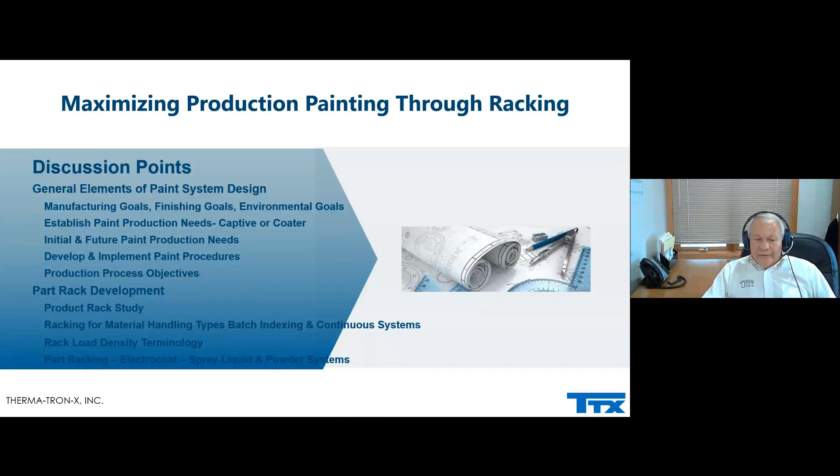We're also going to talk, obviously, about part rack development, how we should look at doing product rack studies, racking for material handling types, whether it's a batch type indexing operation or a continuous. Discussion about rack loading terminology, density, and part racking for E-coat, spray liquid, and powder systems. We're also going to be discussing 2-coat system rack considerations, whether it be separate 2-coat paint line systems, integrated 2-coat paint systems, types of conveyor rack loading and unloading considerations.

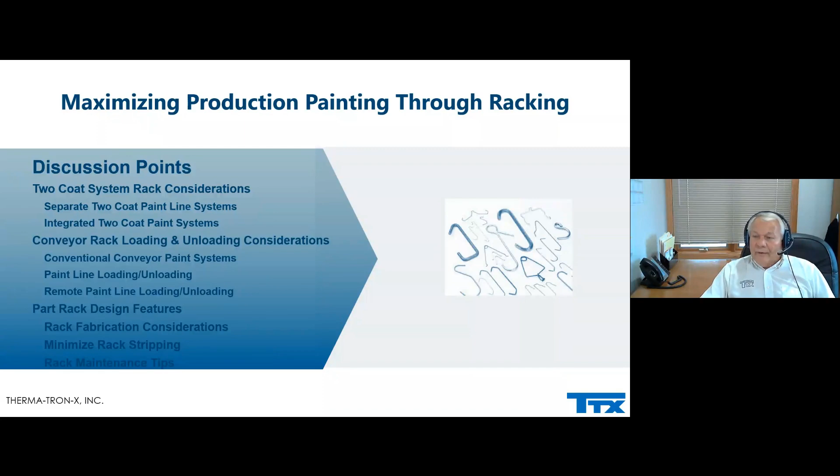Conventional conveyor paint systems with typical types of material handling, paint line loading and unloading characteristics, and remote paint line loading and unloading. Some of the savings can be seen with minimizing double handling. And then part rack design features, rack fabrication considerations, minimizing rack stripping, and rack maintenance tips.

Elements of the paint finishing design are manufacturing goals. You first have to establish your manufacturing goals as to what products you're going to be manufacturing or coating, finishing goals, you have to establish those, and environmental goals. It all is related throughout the whole entire plant. When you plan on a paint finishing operation, these are probably elements that some of you already know. However, I'm going to repeat those because it's vital to understanding the impact once you establish a paint line or a procedure for manufacturing, finishing, or environmental. Your impact is going to last for years.

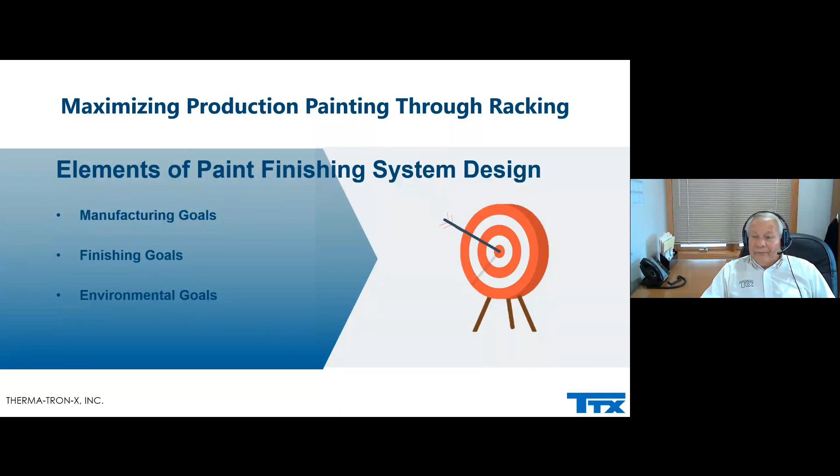In manufacturing goals, you have to look at it from the standpoint of establishing repeatable fabricating techniques. For those who manufacture, look at the techniques that you're using so that they can be repeated and keep the surface impediments down, minimizing them so that the finishing operation can be established and you can keep the rejection rates down. Integrate the manufacturing process through the plant and minimize double handling. It's vital from a cost standpoint. Handle it once, and handle it the second time through unloading or assembly.

Reduce or eliminate unfinished and finished part storage. Many times I see a lot of these companies now, a lot of the plants that I go into still have areas where they store parts for painting, staging areas for assembly. Most of the new products, paint plant manufacturing facilities today are going more flow through and just in time. But with the onslaught of, especially today with the logistics, many are starting to do the same techniques they did back in the 60s, where they would store and queue parts for painting as well as storage for assembly.

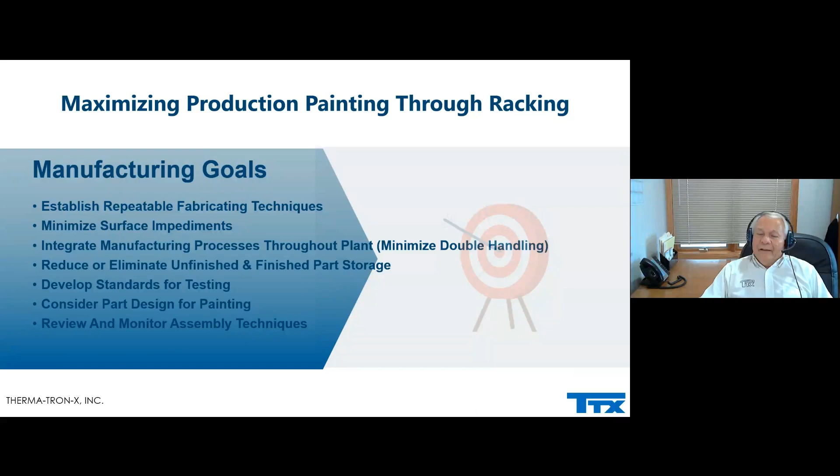Consider part design for painting. Those are aspects that I'm going to get into here, and review and monitor the assembly techniques that you're doing so that you're not damaging product. Make it relatively easy to assemble or package, and therefore be able to minimize any defects or rejects during the handling process.

The finishing goals. One of the things that we have to look at, and everybody should know this, but some people may be new or not familiar with the requirements: identify the technologies that you need for your material substrates, whether it's steel, aluminum, copper or whatever it may be. The process for pretreatment and surface treatment prior to painting is of vital importance for paint performance. It's the bonding agents that help facilitate the paint adhesion, paint performance, durability, etc.

You might consider iron phosphate, zinc, zirconium, zinc phosphate. A lot of new ones that are out there are neutral pickling to etch weld areas, etc. In aluminum alloys, it could be all kinds: zirconium, clean only, Alodine conversion coating, or non-chromate.

And the types of paint finishes that you want to consider are prime coats, whether it's a single prime coat or a single finish top coat for general industrial interior use or exterior use, like the outdoor garden market. There's a lot of people looking at a single coat finish. Two coat finishes like prime and top coat, and tri-coat finishes, a three coat process, are used for long-term durability, such as the painted transformers out in the field for electric power. That's a big thing right now because a coating lasting 20 years has to meet a lot of criteria and a lot of environmental issues.

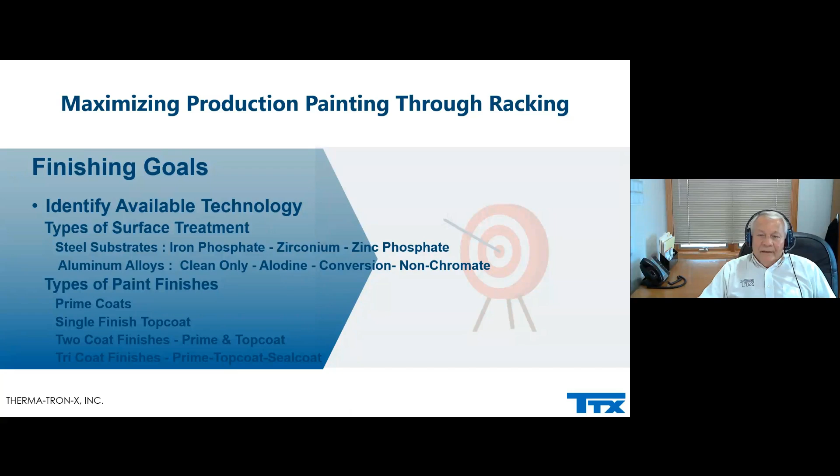Environmental aspects. When we look at a paint finishing system, we look at three different categories: manufacturing, finishing, and environmental effects. The choice of the type of paint or surface treatment, those are the key elements of integrating a successful paint finishing operation. Choosing HAPS-free and low VOC materials for paint is of the utmost importance. 20 years ago, it wasn't a major factor. It became that way now, and everybody has to look at it. There are some applications where you're not able to because of the finish type requirements.

A lot of water-based materials are being used today for the automotive market. There's still a lot of progress to be made in that area because of performance requirements. Consider alternative processes to reduce the environmental effects on air and water, like water-based and powder coating. When you try to consider powder coating a car body, which has been done, there's a lot of issues and a lot of cost involved. We're not there yet, but they're going. That's why a lot of the OEMs are going to water-based finishes.

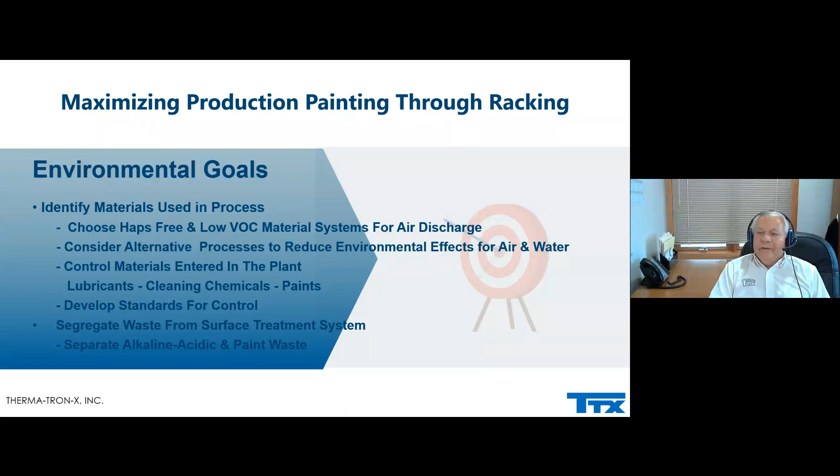Typically, paint waste. In the case of electrocoating, you might have paint solids, BODs, which is biological oxygen demand, some solvents and chemical oxygen demand requirements, and paint solids. But typically, that particular type of painting is very environmentally friendly. Same thing with powder. So recycle that powder. There's plenty of people out there that'll take the powder that is not used with the powder fines, liquids, the stripping aspects of liquids, and even powder. Those are all aspects of what we have to control.

One of the key elements of racking and material handling through a whole plant is establishing the production needs and identifying the production targets that you have. If you're going to be a captive shop, you identify what you are in terms of what the products are going to be, what you're going to be having to handle, how you're going to handle that from fabrication to painting to assembly or shipping. And one of our biggest concerns is the control of that production through, right now, Ethernet and wireless control systems, where you can download serial numbers with RFIDs and smart reader tags to identify from fabrication what the painting needs are.

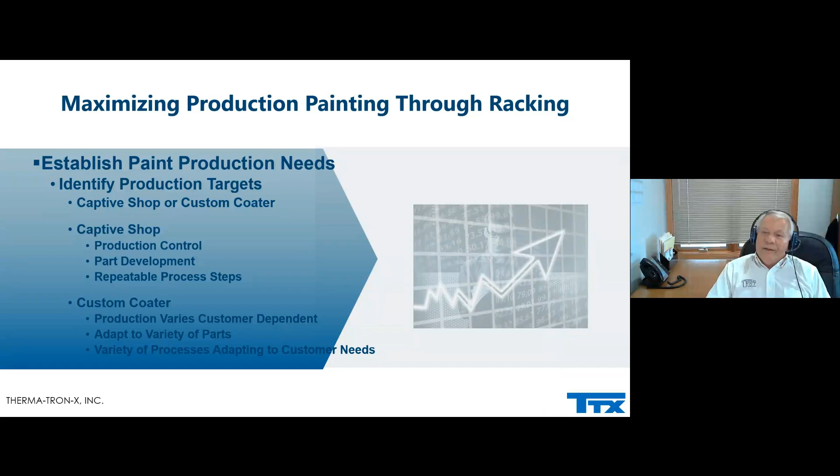The same goes for the custom coater. When you look at the custom coater, they have a bigger challenge. Their production varies, customer dependent. But if a customer brings in a product and identifies what those products are, the custom coater has the ease of a system that can identify what that process is, what is needed, and what his responsibility is to deliver a product to the end user for paint performance. They have to adapt to the variety of parts needs, and that's what a custom coater's specialty should be. The variety of processes adapting to each customer's needs is important. So they may have multiple lines of surface treatment. May have multiple lines of paint finishing.

Again, one of the biggest things in racking is to itemize all the parts to identify production, establish total parts by process. If you have galvanized, if you have carbon steel, if you have aluminum in one big plant, all three of those are going to be different processes. It may be one paint process like powder or electrocoating or two coat applications, but the pre-treatment and surface treatment is going to be different. The methods of keeping that product to the highest performance level is the key element of surface treatment.

And when you look at the aspects of having a chemistry that one fits all, you're sacrificing maybe some of the performance characteristics for maybe galvanized or maybe aluminum versus steel. Or if you're doing an aluminum and galvanized process and you're using, let's say, a cleaner that is not as aggressive for those, and you're putting carbon steel in, then you're ending up having to sacrifice some of the etching or cleaning capability for the carbon steel parts. The major concern is weld areas and things of this nature.

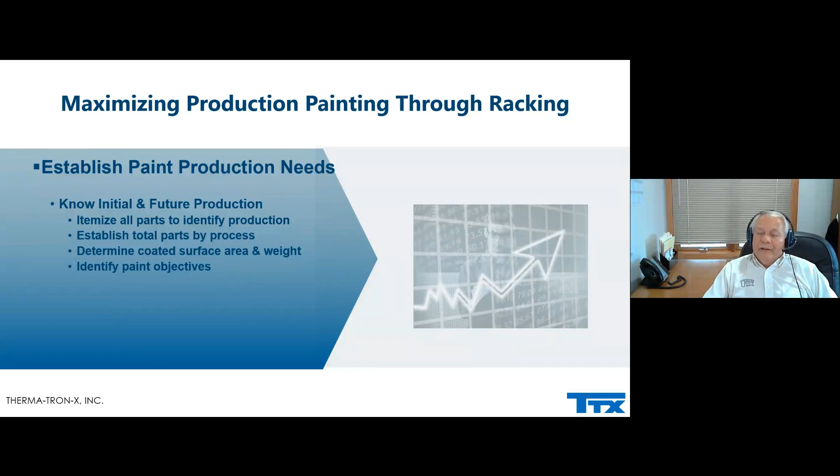Determine that coated surface area and weight. When we look at the needs for racking, you have to understand what is the coated surface area and weight to identify the objectives, the amount of coating that you need and the amount of surface chemical that you're going to need to do the treatment.

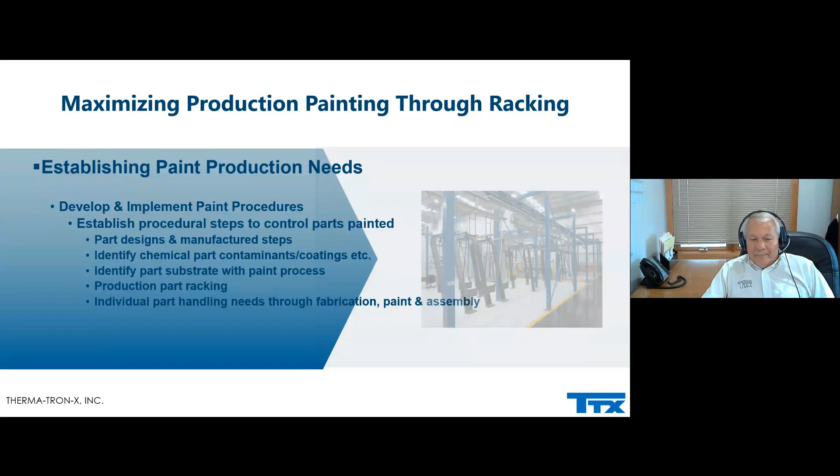Develop and establish procedural steps to control the parts painted. I mentioned part designs and manufacturing steps, and identify the chemical part contaminants. Identify the part substrate with the paint process, and production part racking.

Identify all the sources of the paint costs. One of the things that people don't understand every time I go into a plant is they don't know what their paint cost is. Well, what is it costing you to paint that product? It seems like everybody seems to bury that cost. The purchasing guy is buying the paint and chemicals. There's consumables, bag filters, nozzles, replacement parts for the paint line.

The other aspect is also the energy costs, the utilities. What is it going to cost you to run? The gas, the electric. Everybody wants to get away from fossil fuels, but we've had customers ask us what the cost is going to be to convert from gas to electric. Now, when you start looking at going to electric, the cost for electric versus even the gas cost today, even at a higher price, it is still much more economical to do fossil fuels.

And maybe in 20 years and 30 years, it might get more economical to do, but to convert all the existing plants to electric from gas and fossil fuels is very capital intensive. So, those are kind of things. And the way you can establish this is that you develop your chart system, and I'll show you just briefly here how we can take a look at what those costs are going to be.

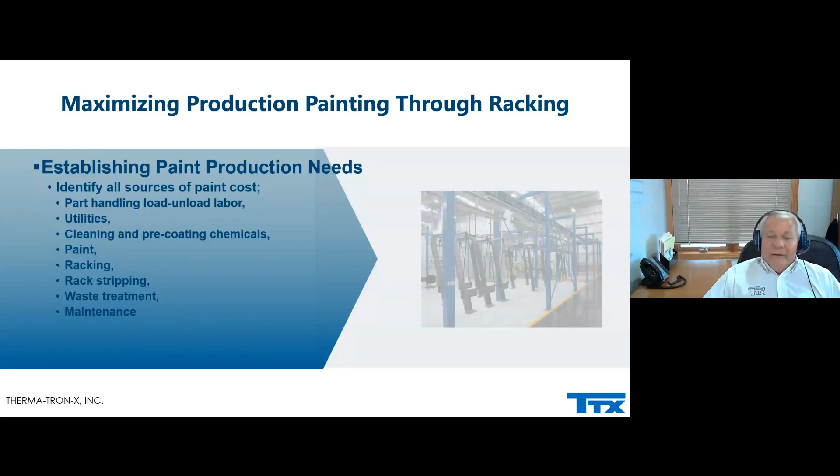One of the major things that everybody should look at planning-wise is to develop a process flow chart. If you're a custom coater, every customer should have a flow-through process applied, from when he receives the product to what process those parts are going through. And it gives the customer an identification of what that process is and all those step parameters, so that if you have a rejection area, you can identify it.

The other side of it is that if you're a captive shop, look at it from the standpoint of how many different fabrication cells you're going to have, how that product is brought and delivered to the paint line, how that product is going to go from the paint line to the assembly, and what assembly cells. Every plant that manufactures today should have some kind of a flow diagram chart to understand.

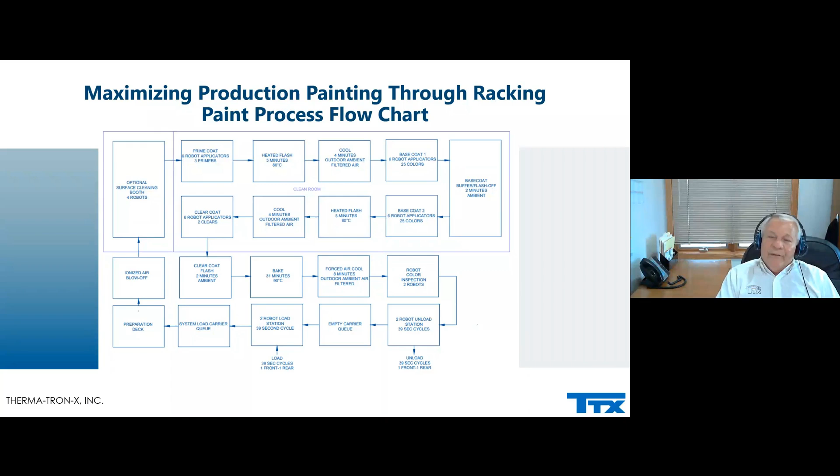And if you illustrate this on bulletin boards for employees, it gives the people that you hire and your employees a method of understanding what goes into a product. So it's really essential to have that communication today, especially with a lot of the labor market that maybe is not quite educated enough to understand it. But if you communicate those processes to them and what the functions are from start to finish, it gives them an incentive to understand all those different processes.

So, determining the process objectives and paint performance are essential to identify that process. I think I mentioned the metal preparation needed, whatever paint needs you have. It may be epoxy, acrylic, polyester, and those are determined by a lot of the paint suppliers and chemical suppliers that help aid you. But basically, the customers out there dictate that application.

Maybe you have the type of second coat for a two coat application. It might be a spray liquid or a powder. Which is easier? If you have many colors, is powder the right way? Well, if we go to spray liquid, can I do water based? Can I do solvent based? How much VOCs are going to be in it?

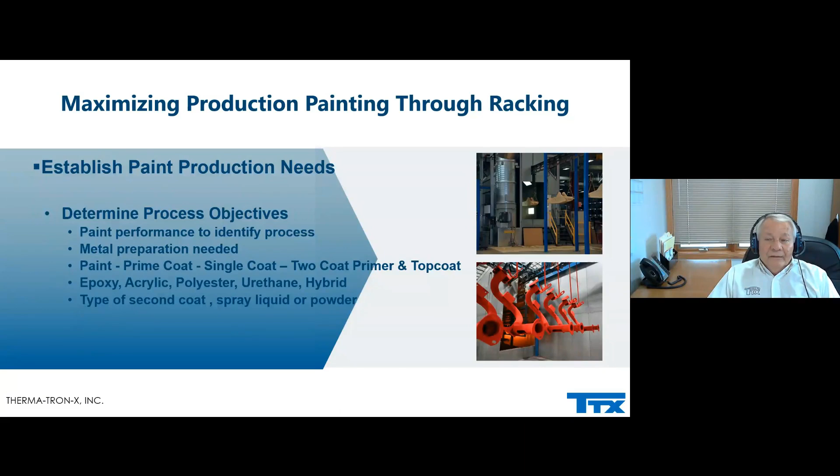And again, the VOCs and the amount of usage all go into the application of how much surface production you're doing. The utility aspects is how much mass you're going to be utilizing in that paint line. And so it's an important factor of knowing all those criteria going into a process.

For those currently running paint shops, get some of the engineers or people that are responsible to help you get a handle on what those costs are, because today the marketplace is so competitive. You can either lower your price and not know what your costs are and take a bath on it, or know your price and have some leverage with your suppliers and your customers.

So some of the objectives, especially for captive shops and obviously custom coaters: if you could get parts that are pre-racked, that's great because that saves labor. You develop racks for shipping. Minimize the double handling. One of the ideas for captive shops is can the parts be racked at fabrication? Some of the techniques could be manual or robotic.

A lot of the trend today, especially with the tier one and tier two suppliers, is using robotic loading capabilities. That dictates the type of rack that you have, because if it's a robot, your densities might not be as high as an operator can load in tight spaces. But the robotics and the programming for robotics are getting better and better to facilitate high density loading.

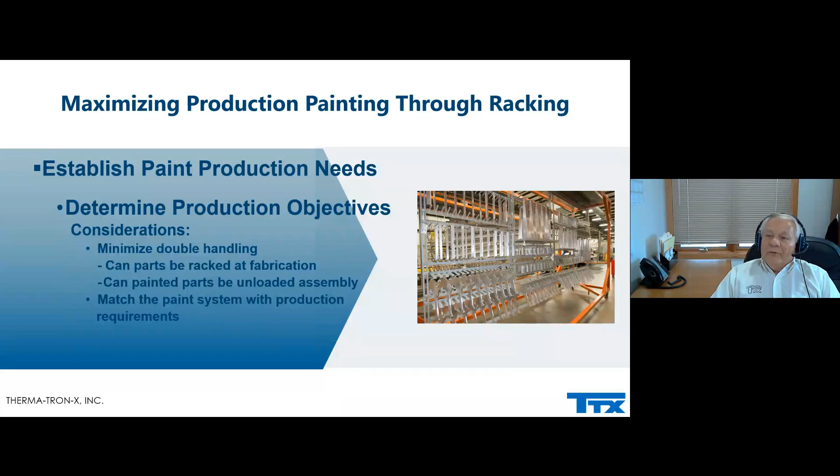And so when we look at part rack development, those are the production aspects of different types of parts and how many you can get in there, and they're all different kinds of configuration of racking. One of the key elements to know is the largest part that you're going to have to produce in the paint line, and prepare a part rack study.

And the list should be what your parts per year are. It's parts per year, day, shift, and hour. It's vital to understand what those volumes are, whether you're going to run one shift, two shifts, three shifts, and what the impact is on the utility costs and consumable costs to run that.

Physical dimensions of the part as hung on the rack are very vital because you know the size of the rack. The part surface area to be coated, again, I can't stress that enough. It's extremely important to know the coated surface area or the treated surface area. If you're just treating the parts for just cleaning or phosphating only and putting in, what do they call it?

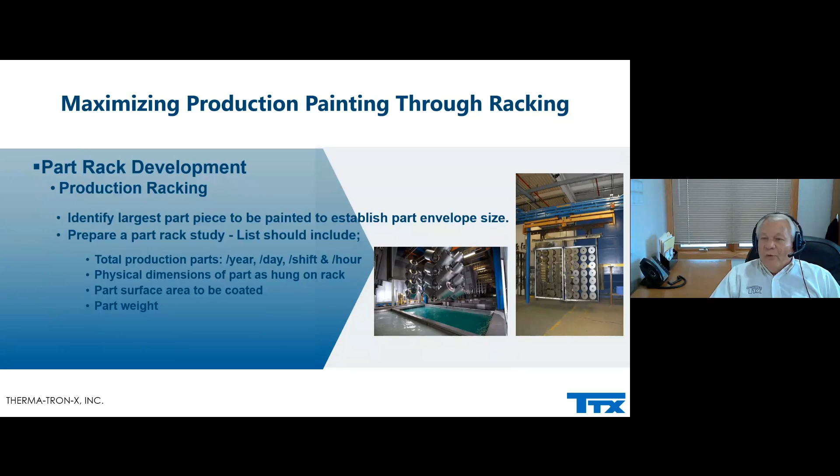A part that you want to that aren't painted, rust preventative. I'm sorry, that's what I was looking for. My apologies. You just need to know what that chemistry is going to be based on the surface area that you're going to have. And part weight is all going into the mass.

all goes into negotiation with your paint suppliers and chemical suppliers. Knowing how much surface area is going to be coated is going to tell those suppliers of yours that you're doing a lot of volume here, and the cost of the paint, if you're going to go 1 mil or 2 mils on a powder or electrocoat or whatever it may be, it all goes into how much cost you're going to

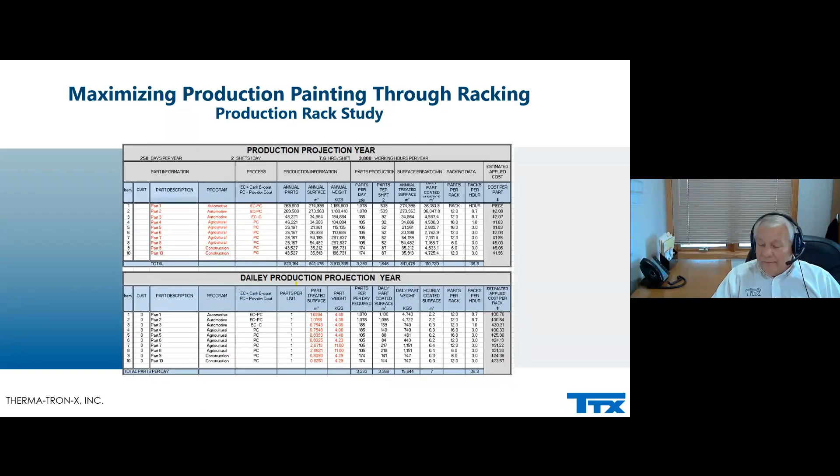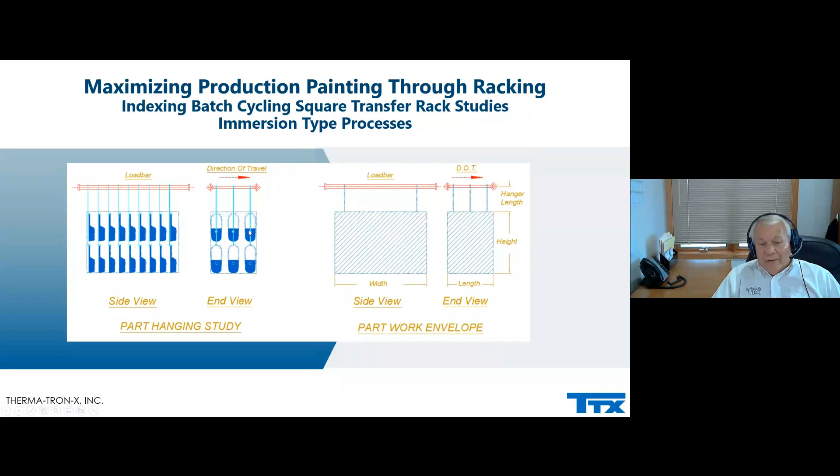Obviously, after the virtual study, you have a little rack study. It's important to get the outline of the largest part. You do your part study. This happens to be an immersion process study for component parts that'll be electrocoated. With the overhead continuous systems, monorail rack studies for spray and immersion.

If you're doing a spray application, don't be fooled by trying to load too many wide parts, because if you're trying to spray those parts in a combination of immersion, those parts will not see the sprays because they'll be robbed. They only see a line of sight, and you may not get all the surface areas. That's pretty well known in the industry, but a lot of people still try to do it. A spray application is a matter of contact time.

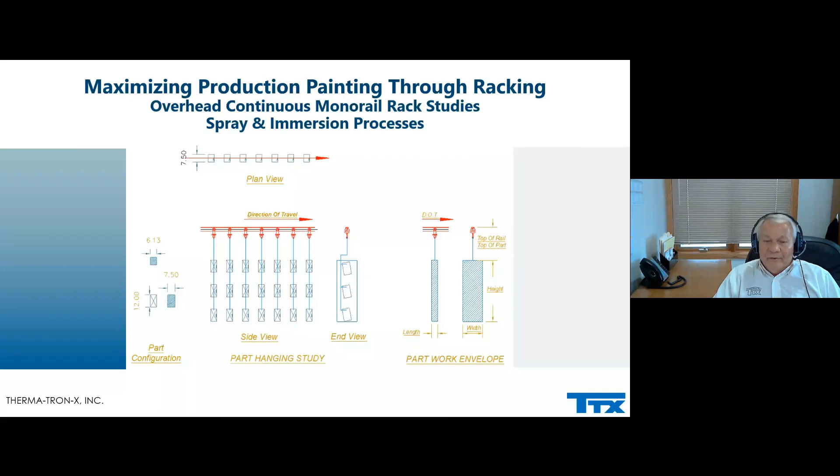So if you're doing a cleaning, if you've got a product that's relatively simple to clean, it's easy and flat. But if you have geometries that are box shapes or other types of hidden areas, you may not be able to do that. It may be a requirement for a combination of immersion and spray. What it does do is minimize the amount of chemical drag-out when you use a combination of both.

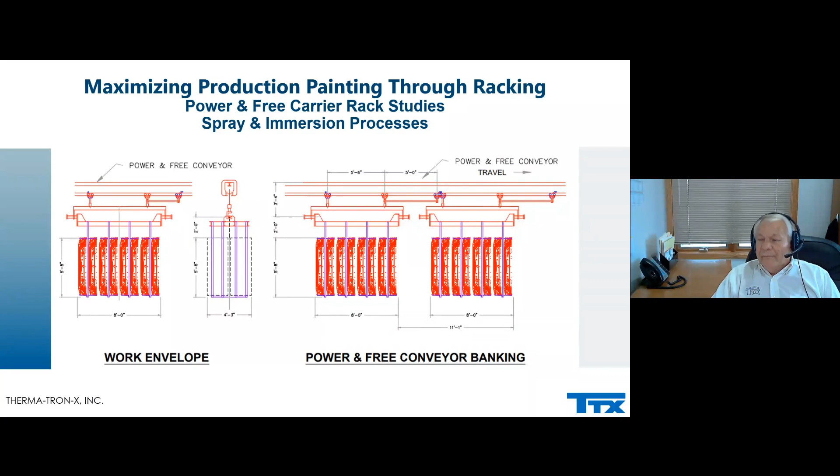There's obviously other ways to group parts with a power and free conveyor, utilizing banking. One of the big facility advantages to going power and free is it's a flexible way of loading for high-density racks, as well as splitting them for application for spray coating.

There's different specialty racks. When you have heavy racks that we call skid racks, they can be delivered with a different handling technique instead of overhead. For electrocoating, you may have areas that are recessed inside. You put auxiliary electrodes in there with a conductive bus bar.

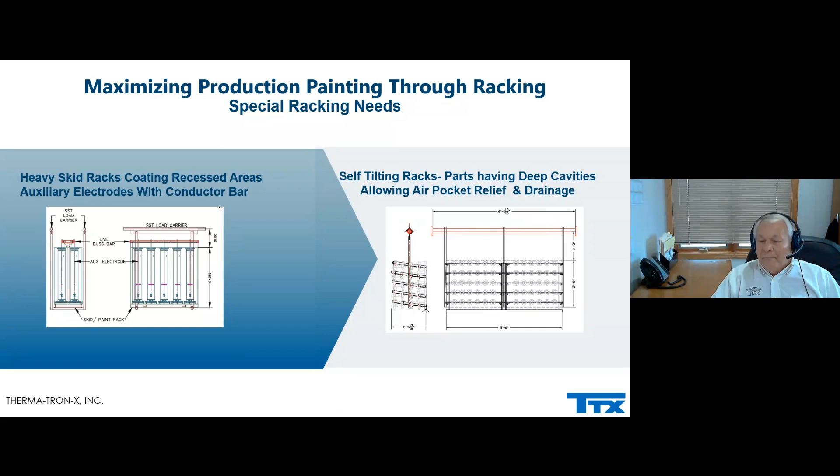You end up having the ability to get uniform coating. They're self-tilting racks, for parts that have deep cavities allowing the air pockets. These are sail racks if they go into immersion or even immersion chemicals. There's numerous ways of tilting these racks, and the flexibility can be done through using cone shapes and what we call sail flags that allow the rack to burp those loads as it's going through an immersion process.

There's different types of racks, the specialty racks for bulk coating. If you're not bulk coating and you have the capability of doing that, I would suggest that you consider it. Here you see springs. There's touch marks with electrocoating. Obviously, with powder you can't do this, but for electrocoating you can actually do bulk, and several people are doing this in the marketplace. And if that spring has a color code that has to be applied, it is then taken and hung on a load

individually for powder coating. Again, with touch marks in electrocoating, customers still have the performance requirements, because some of the touch marks are still more prone to corrosion. So one of the things that has been used in the marketplace is basket coating. The fastener market is very big in construction fasteners and even in some of the automotive fasteners where you use barrel coating. Barrel coating allows you to minimize the touch marks by shifting during the electrocoating process. For example, when you dip this barrel into electrocoat, you can orientate the parts after a minute and shift them a little bit to allow more deposition on the touch mark areas. So this is very successful in the marketplace today.

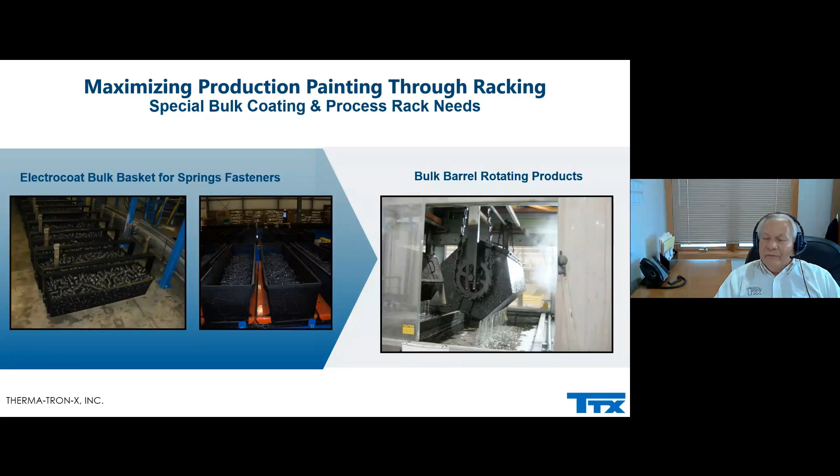There are special needs for that. In the case of electrocoating, conventional steel anolyte cells aren't used; precious metal type electrodes are used because of the amp densities. But the ability to coat through deep recesses is very successful in today's market. In anodics, acrylics have less throw power capability, so your densities are going to be a lot less. Epoxies have higher throw power. Parts can usually be hung in a rack in multiple widths, optimizing load densities.

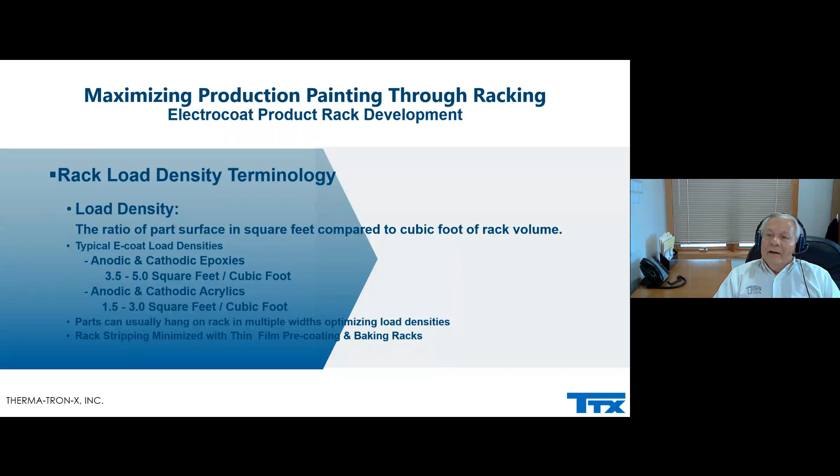The rack load densities that you see for liquid and powder applications are smaller. Rack spacing and line speed determine the density, more so than the number of parts per rack, because parts can only be single hung. The tighter the rack spacing, the higher the density, obviously. But it also depends on the gun technology you're using and the ability of the guns to keep up with that density. Your densities are a lot less because you have to spray coat. But there are techniques you can improve on depending on the pretreatment process, surface treatment, and how we approach the application of top coat or single coat systems.

Again, for spray coverage, it's important that the densities can be kept up through rack spacing. You can maximize the amount of parts on a rack by having basically a complete sheet wall, even if it's small parts. If you have a full sheet of sheet metal that you're applying the coating to, it's the most efficient. You can control the film build much more closely. But when you have small parts spaced widely, it's very difficult because you get a lot of wrap and you're trying to compensate for any Faraday cage effects.

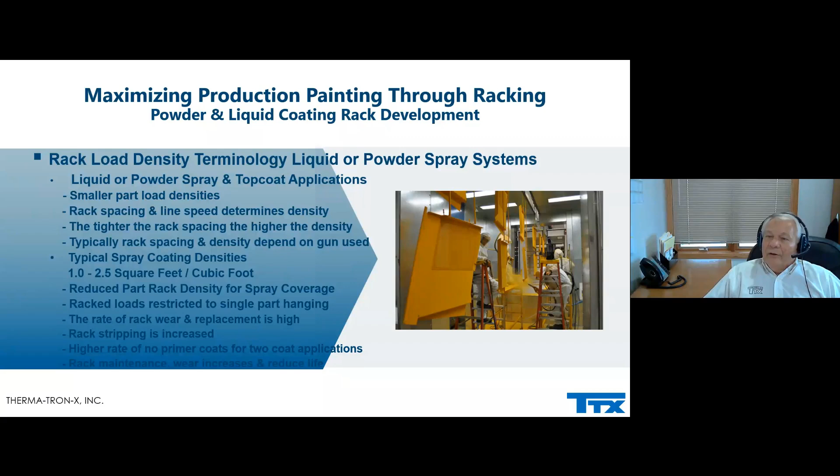In powder, you can get multiple colors and multiple thicknesses. In the case of color coating for electrocoating, if you have 50%, that's where your justification comes in. If you're doing multiple colors and you're saying that maybe I have 40% of one color, 40% of another and the rest is 20%, you can probably design the line with skipping those electrocoat areas and applying just a powder top coat, single coat. So there's numerous ways of approaching it.

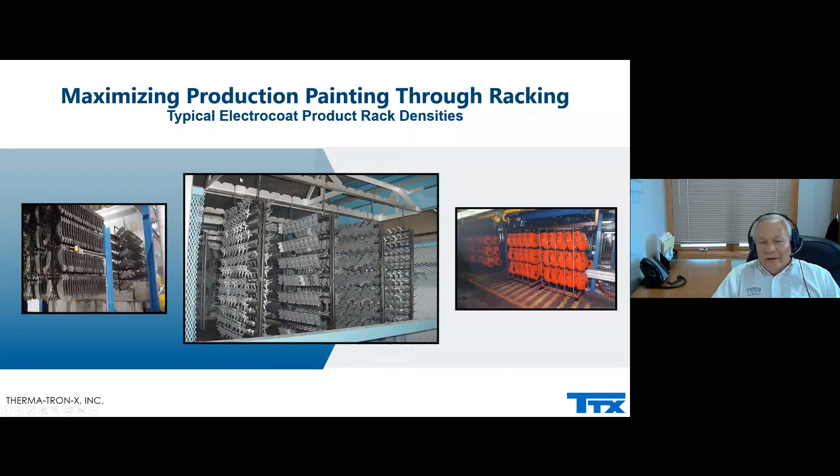That's a typical type of rack density. If you're not going to those densities, see these racks here, some of those racks are going to be offloaded and powder coated too. So you can see why the style of rack is chosen here.

One of the things that I want to educate, if you don't know much about electrocoating, basically it's a process where you have paint solids and you're applying a charge to the paint solids, and the paint solids migrate to the surface areas. One of the unique things is the current density and the flow of voltage goes across these, and the solids that hit the surface bombard subsequent solids and dehydrate that first layer of coating. That's through electroosmosis, which is basically the power generated from the current.

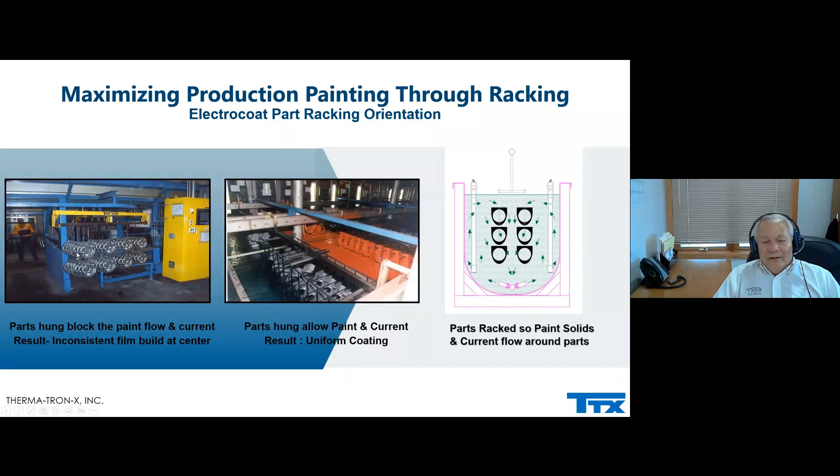One of the problems, and a lot of people make mistakes, is that here's a rack that's going to go through. Here you see the same product; the electrodes are always located on the sides of the tanks. And if you process through a square transfer type system, you want the current to flow through these parts so that you get a lot of solids and a lot of current flowing through. If you load this way, you're blinding off the center ones, and the current has a hard time getting in. What happens is you get inconsistent uniformity on the paint coating.

Here you have a diagram of a product that is used today in the EV market. There was a customer that loaded his racks this way, and the direction of travel is going this way in the plan. He had to put additional electrodes here, but initially they put electrodes on this side and on this side. And what happened is the current, those little arrows that you see, had to follow through and had a lot of resistance.

So basically, they ended up having overcoat here of higher film build than the ones here to achieve the minimum thickness. When you load a product in an orientation that allows the current to flow through, even though the distance here is 2 feet longer than the distance here, there's less resistance. The paint solids either way are going to go through it, because you want a circulation of motion there. But the current is the most important to get the uniformity. So just a little education on that end of it.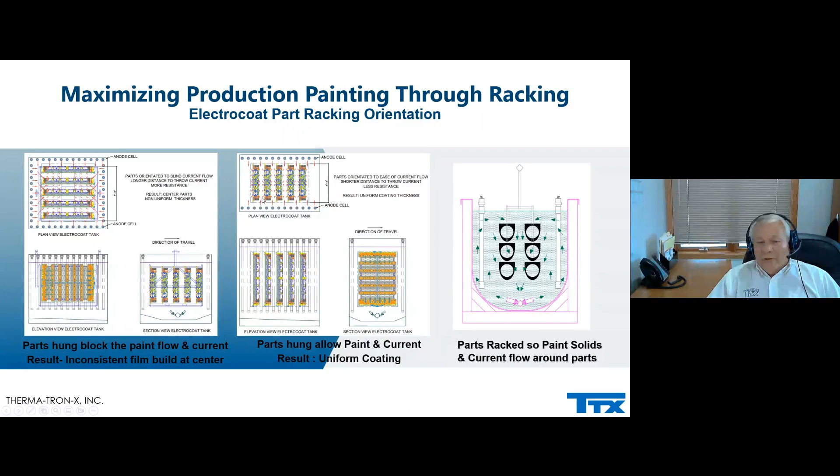And it actually goes for powder too, because it's electrostatically charged. But basically, depending on the spacing with powder, you can space these larger, and if it's a short distance, you can corona charge that and still get the powder applied very well.

Typical spray liquid powder densities, just to show you. Here you see a cart. Now this is a captive shop. They do light poles, 30-foot light poles, but they have small parts. But you can see that you can get, and here they're doing exterior work. So basically, these parts will be electrocoated in a two-coat application and applied powder coat.

But you see that you can utilize this rack for powder coating in a load bar situation. And the parts are actually run through an immersion process, and then it goes separately through to a powder. And again, you can see some of the densities are there because the more product that you can get closer, as long as you can reach those powder areas, in this configuration, the corona charge is going to hit it very well.

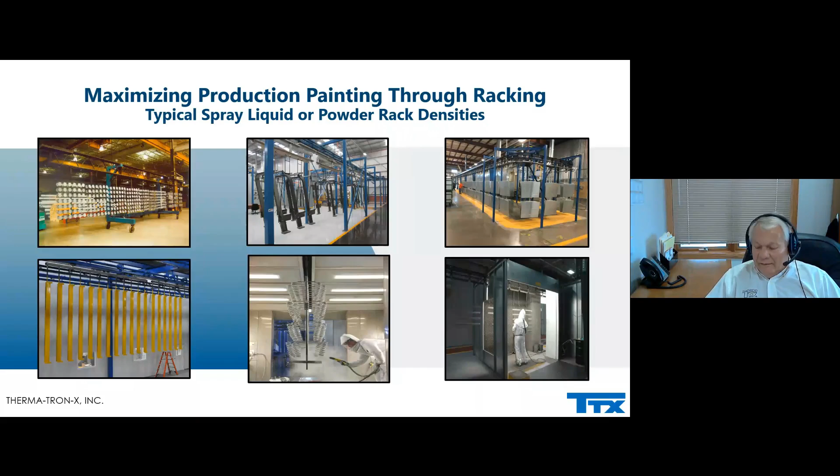The one on the right here is simplified, where you have one-sided, and you can do two parts per rack, double stacked, which gives them a single coat on one side. Same goes for this particular product. So you can see the densities, and then when you look at liquid, sometimes it's even worse. Here, your densities are not as high. If you're using conventional air with a liquid system, or HVLP, you're going to get some wrap, but if you've got to coat both sides, you're going to have a double rack, double load booth, spray booth, and your rack spacing's got to be a little bit larger in between.

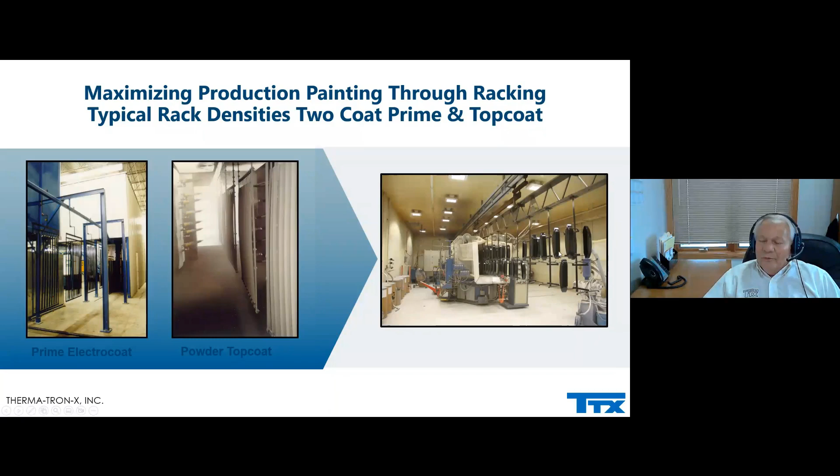Typical rack densities for two coat, as you see here, you see the parts. These are for luggage racks. Basically, it's an inverted conveyor to get the E-coat coming through, and you have as much density as you can. Why can't we coat these twice? Well, a luggage rack has to be coated on both sides because it's going to see exterior ultraviolet rays on one side and moisture on the other. So they powder coat these and apply. A typical rack can be hung with a lot more density, but in the case of two coat applications, you are going to lose a little bit of rack density because of the powder coating application.

There's two ways of thinking on two coat system application for rack processing. Design the system with two separate lines running, where you have a dedicated prime E-coat and top coat line. The positive is a higher rack density through E-coat, which is great. You can separate those. Multiple part racks can be run in groups, and individual racks transferred to top coating. The negatives are racks must be transferred to the top coat line. The higher labor cost is going to be due to the rack transfer, obviously. There's going to be more racks and more complex configurations.

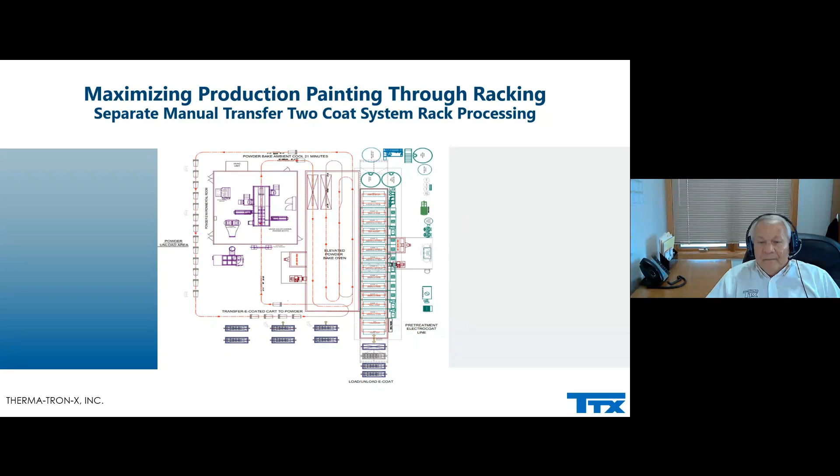Here you see a plan view of the system where you're using a square transfer device, which is optimum efficiency for pre-treating and coating for two-coat application, and then transferring. These are for shopping carts, by the way. The parts have to be transferred to the line. There are other advantages, other techniques.

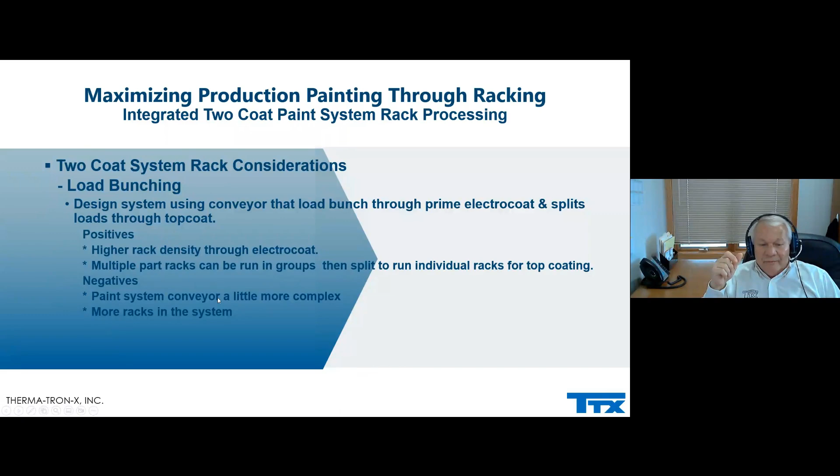If we look at integrating the two-coat paint system rack processing, we could do what we call load bunching. You design the system using a conveyor that load bunches through prime electrocoat and splits the loads through top coat. The positive is higher rack density through E-coat. Multiple racks can be run in groups, then split individually for top coating. The negatives are the paint system conveyor is a little more complex, and there are more racks in the system.

So it's a simplified version of this, in terms of using power and free. You could use a monorail that could go through and take off those parts; there's a lot of different ways. Monorail density, remember, if you load to a monorail, you're only single hanging it. If it's an immersion process, that's one thing. If it's all immersion, that's a long system compared to a square transfer. If it's a spray and immersion combination, you're going to lose some rack density. So remember, with immersion monorails, you're going to have longer immersion times because of the inclines and declines. A square transfer is less tank volume, less chemicals, more effective.

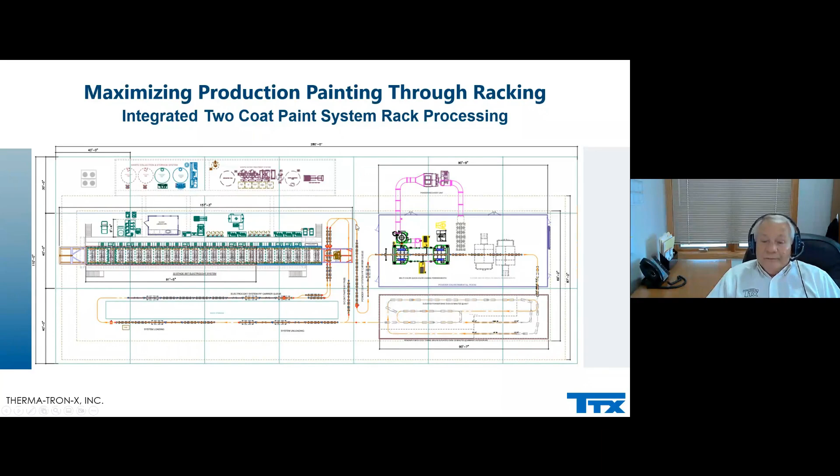Here, I was going to explain to you how that works. With a power and free, you can actually have a wide load, but to get the efficiency of narrow loads, we can design the line so that your racks can be done 3 at a time, or 2 at a time if you have a medium part. So it gives you the flexibility of what we call rack bunching to make it more cost effective, the price per rack, the price per part.

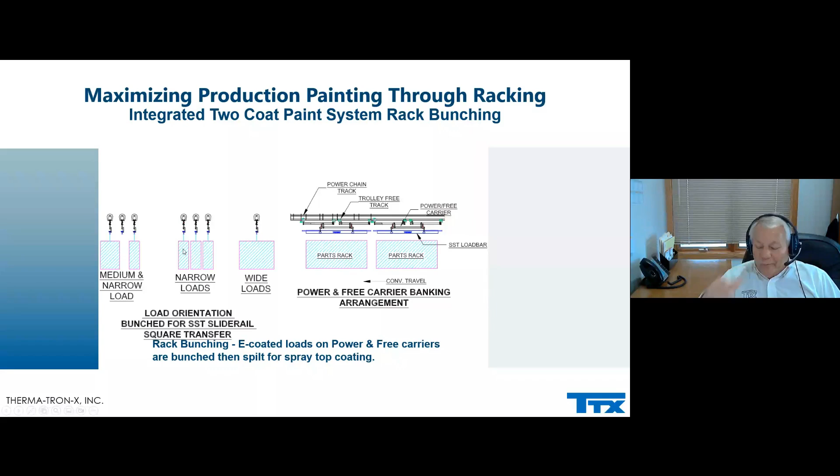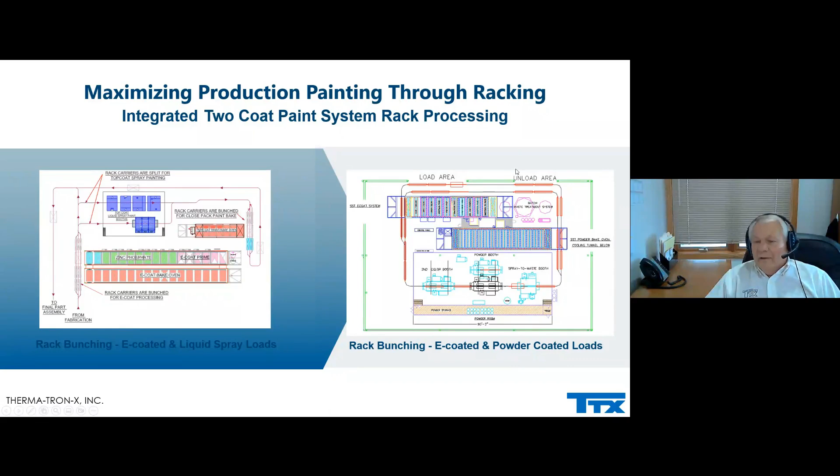Minimizing part handling considerations. Develop and transport a system to pre-rack parts remotely from the paint system. As I mentioned earlier, utilize the same people racking at fabrication or robot loading or at weld assembly operations. Outsourced parts suppliers should consider pre-rack parts. It's going to save you money if you go outsource, and the custom coater would like to have self-supporting racks.

In the long run, the tooling costs that you pay the custom coater are going to give you the ability to take that rack, load it at fabrication, ship it out, and say, hey, we gave you a rack of parts. If there's parts missing, hey, we gave you a full load, and then bringing those parts in for assembly is going to save you a lot of handling and scheduling issues.

Dedicate a team responsible for loading and unloading. Create incentive for those teams of people. If they're at fabricating, if they're a captive shop, make sure that you have one guy responsible for making sure that the fab cells are loading it the way it is. If you have a robot, they already know. If it's an operator, they probably already know. But you want to be able to fill those racks up. A lot of people have a half rack: we need those parts, go. It's going to cost you more for those parts with a half rack than it is a full rack.

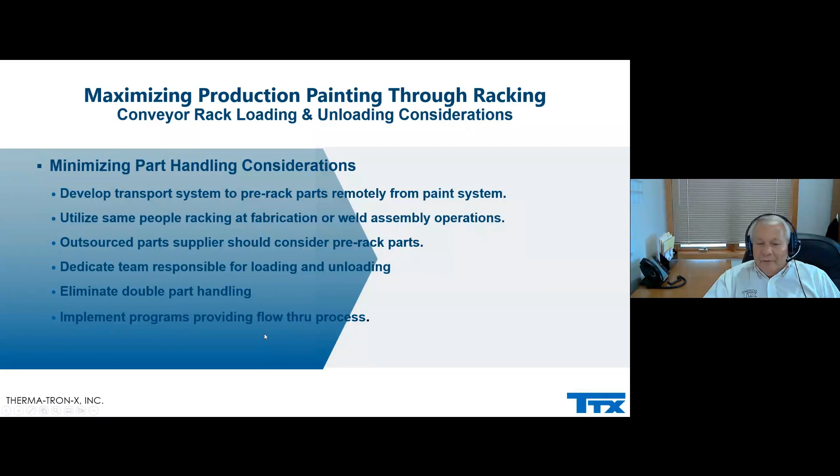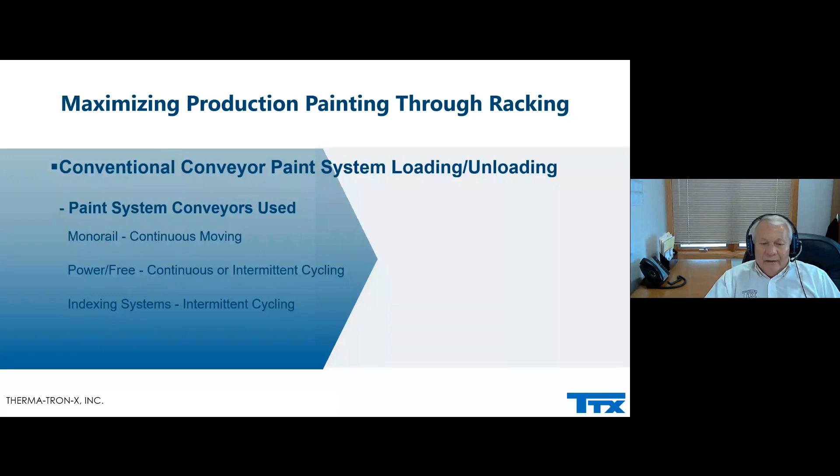Eliminate double handling, as I mentioned, and implement programs providing a flow-through process. I think I mentioned that to you earlier. There are different types of conveyor systems to do such things. There's obviously a monorail, continuous moving; power and free, which is for continuous or intermittent cycling of racks and load bar systems; and indexing systems, which is intermittent cycling.

In a continuous moving system, to make it most efficient, it requires dedicated part loading and unloading manual operators or robots. So what you see here on the left is basically a very long, continuous moving conveyor, and you have to have multiple locations, plus staging areas for parts that you're delivering to. Now, if you have a rack cart system and rack transfer, having racks light enough to transfer onto those trolleys and conveyors overhead simplifies the system. But you still have multiple operators, and you're not spending the time of those operators loading a lot of small parts if they can be done at fabrication.

Rack densities can be improved on racks depending on the spacing. One of the things that you run into is that the inclines and declines in a monorail system often require large rack spacing in between. So by implementing different attachments called an angle pivot, which a guy by the name of Jim Dooley developed, you could actually get almost up to 50% more utilization on rack spacing than a conventional monorail overhead system for inclines. Because what it does is it turns that rack as it goes into the incline through gravity at a 70-degree location, so that way you can fit racks tighter in between.

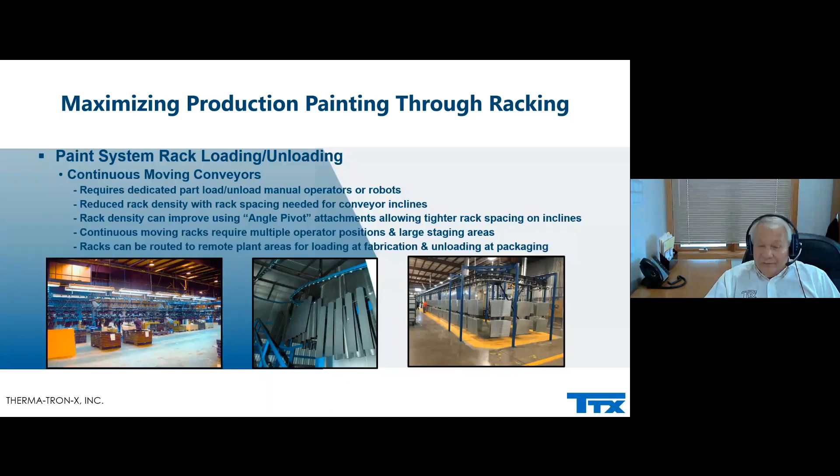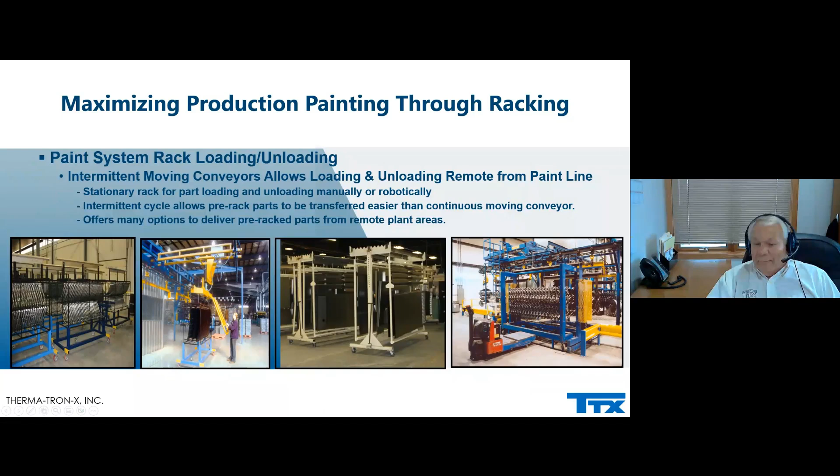There's other methods of loading in a type of square transfer, or even other methods. As I showed you here, we have cart systems that can be done on a power and free or even a square transfer. You can have these racks preloaded and then have a manipulator where an operator just loads it right on. You have cart systems that we can automatically transfer onto a power and free carrier or an indexing monorail. The same with a pallet truck, where it's a self-supporting cart system or even a self-supporting rack.

Here you see one of the biggest trends in robotic loading is that we develop a rack prototype for the client that robotically loads this frame. The frame has a certain support structure. This is kind of showing a bare frame, but there's a lot of little attachments that go on it. This frame is then located by the weld cell or fabricating cell. Robots or an operator loads it.

It could be delivered by an AGV or a forklift driver with an accumulating roller conveyor or a chain conveyor that allows accumulation of 30 minutes or 40 minutes, depending on the lunch break. And it continuously can feed a square transfer system through the process, unload it automatically, and accumulate those for the AGV or a forklift to pick it up.

Here you see a typical style of that, but it's very big now in the automotive areas because more investment capital is being implemented to minimize the amount of labor costs. So the configuration of the racks that you see here, going in, coming out, and going out for either forklift pickup or an AGV. And here you see them accumulating.

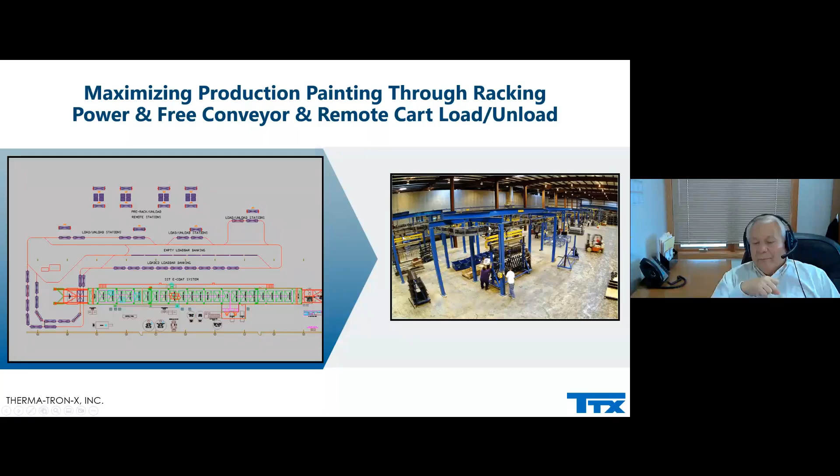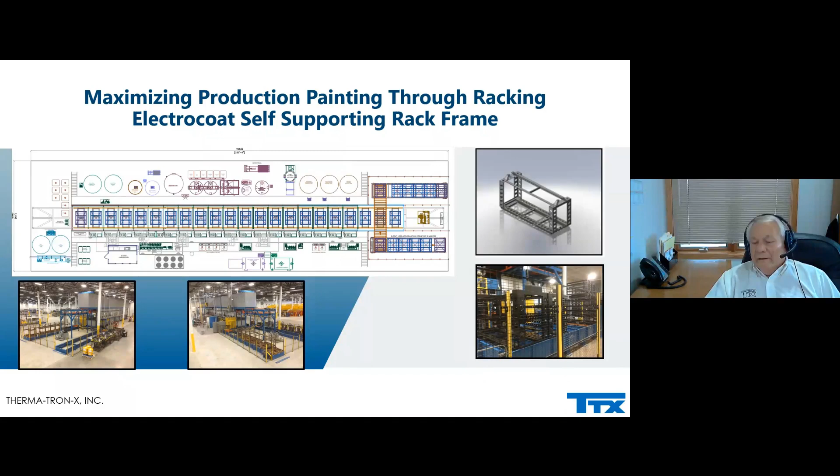And of course, these can also be done with powered rail sections or free rail sections, but you have a support system accordingly. So the back side of this is not such a bad way to go with self-supporting racks. And we designed the system so that we minimize the amount of drag out through the chemical stages and paint stages. And if these need to be done through powder, we can then have the robots unload those and transfer it directly to the powder coating. But in a single coat for corrosion resistance, most customers and most plants do one coat applications.

Some of the part rack design features that I'd like to talk about that people miss are the actual construction of the racks. Everybody I see has round steel racks, and what they don't understand is that it's so hard to retain grounding. If you're using conventional spray guns, it's no problem because conventional don't have electrostatic attraction. But if you're using electrostatic powder or electrostatic liquid or even e-coat, you really need to make that surface break every time you put a part on it.

So what we're looking at here is fabricate the racks with square and rectangular steel members. The edges make good contact for grounds. Serrated case hardened points are very good for maintaining ground. Even if you have up to half a mil, those serrated edges will break that surface, and by having them hardened, it's not going to be wearing so much. New racks should be pre-coated to a thin insulated film. Now that's great for e-coating, right?

What about powder? Everybody wants to go powder. Think about it. How much powder gets applied to a fraction of a rack that has just been freshly stripped? Now, one of the things that you could do is you can actually pre-coat those through electrocoat or a supplier with electrocoat, or you pre-coat that with a very thin powder and bake those racks out, and having that square edge with a grounding gives you the ability to retain that ground in a very thin coat, and minimizes the amount of powder being applied on the rack, because what you end up with is an insulating quality.

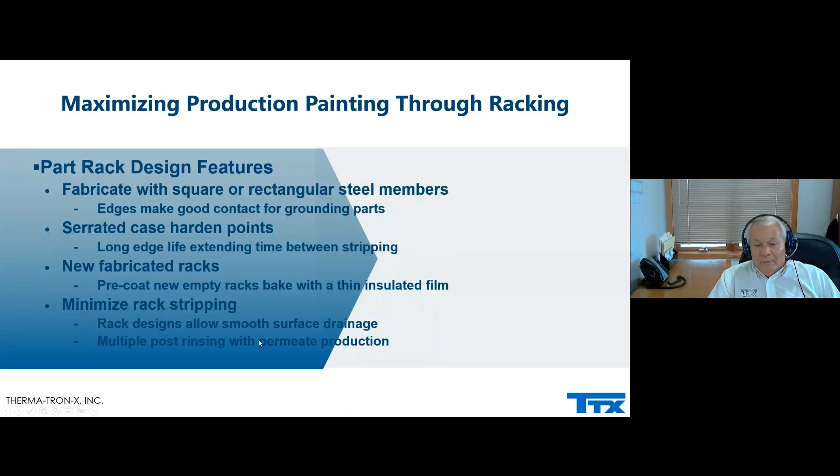Rack designs allow smooth surface drainage. Having the smoother finishes in a lot of areas is going to minimize the amount of carryover from pre-treatment. Multiple rinsing for e-coat is ideal. Here, basically we design racks with one of the things called the universal rack.

You may have a large rack, but for the components that need to be stripped, using square shapes, you could use a universal rack by just implementing small universal racks, which have small hook plates that allow you to rack in multiple rows, as well as multiple heights, multiple single level, and by having those individual racks built that way, you can then take these small areas and have them stripped. You're not paying for a huge volume of racks.

Sure, you're going to have the conductive frame get powder coated, but if you have that frame already electrocoated or powder coated, insulated, the areas that you're having blind for grounding are going to be hidden around an area that is surrounded, where the bar is going to be grounded. This bar will be grounded through the hook area and will allow you to retain the ground.

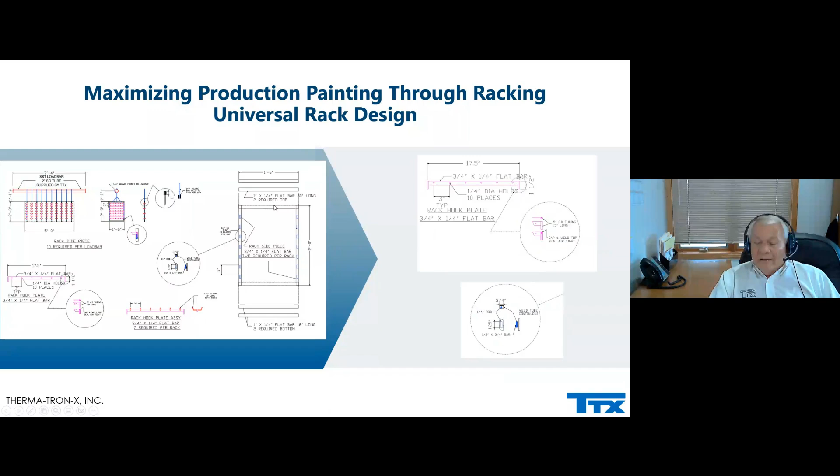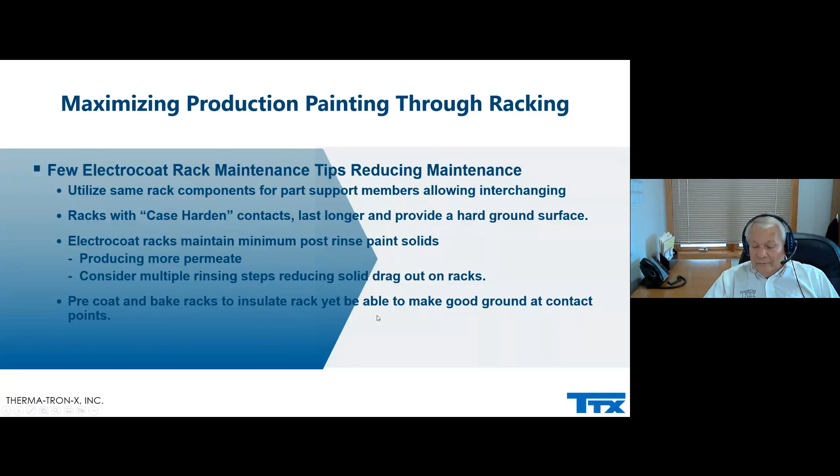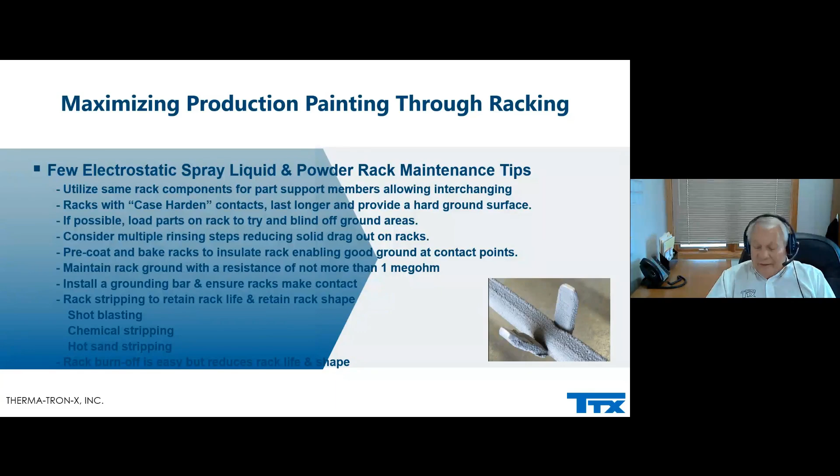Plan on good rack development that minimizes tool costs, the best fit rack handling methods in terms of material handling for part loading, unloading, and material handling for your needs. And tooling cost depends on the maintenance. The more preventive maintenance that is done, the lower the cost.